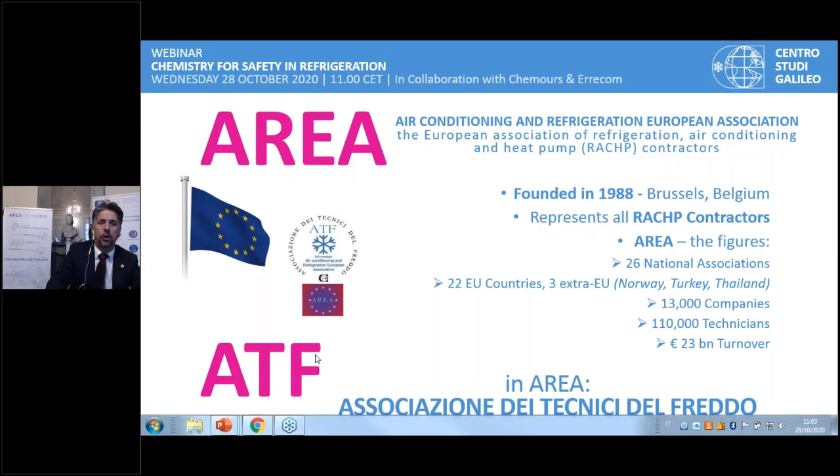I will go quick on this one. We do training, it's our main job. We do training in Italy and in 130 countries with the United Nations, with agencies of UNEP, UNIDO, UNDP, also with the European Commission. We did training all around the globe. For example, we had around 10,000 technicians trained and certified in the last 10 years.

Also, we do webinars. As you know, we have a YouTube channel, the Centro Studi Galileo channel, where you can find all the webinars we have done till now, and also there is one that is from today.

Also, we were one of the promoters of the World Refrigeration Day. Since the beginning, when we started, we were some of the promoters and one of the organizers of the World Refrigeration Day. So we enjoyed it a lot. The World Refrigeration Day we organized on the 26th of June 2020, and the speakers of today were present in this important webinar.

Also, we do conferences. The next conference will be in Milan. We hope to see you in person, not virtually like now we are used to. It will be the 19th European Conference, and the registration is now open. The last conference was very successful, we had 300 delegates from 32 countries, 4 continents, and we had the European Union, European Commission, United Nations, and the most important worldwide associations from America, Japan, Europe, of course, and of course AREA, my association.

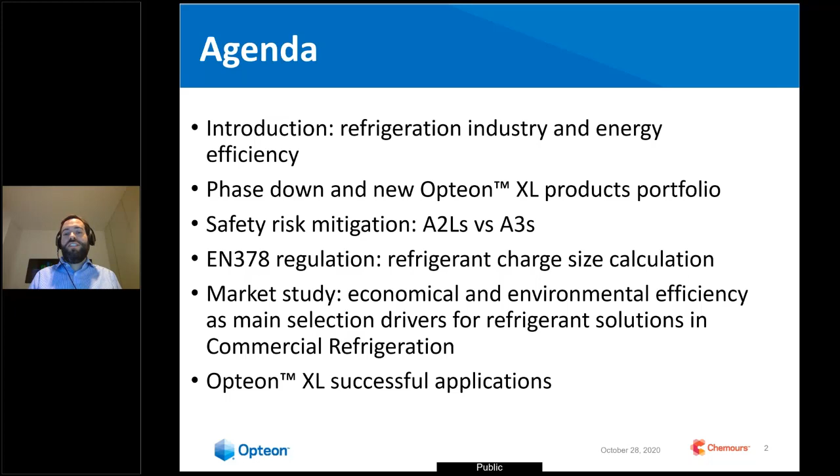So let me start with an introduction of the agenda. We will start with an introduction speaking about the refrigeration industry and the concept of energy efficiency. Then we will analyze the phase down and the new Opteon XL products portfolio, and then we'll go deep into the core of the presentation, which is the safety risk mitigation, comparing A2L refrigerants versus A3s. Then we'll speak about the EN 378 regulation and how to calculate the refrigerant charge size. At the end of the presentation, we will speak about two other very important factors, the economical and environmental efficiency for commercial refrigeration, and we will present some successful applications with real case studies.

So starting with the introduction of the refrigeration industry, I would like to present this study made in the US, just to let you know how important this industry is and how the demand is set to grow in the next years. You can see it is right behind the digital games market, for example, with an expected revenue of $135 billion in the US.

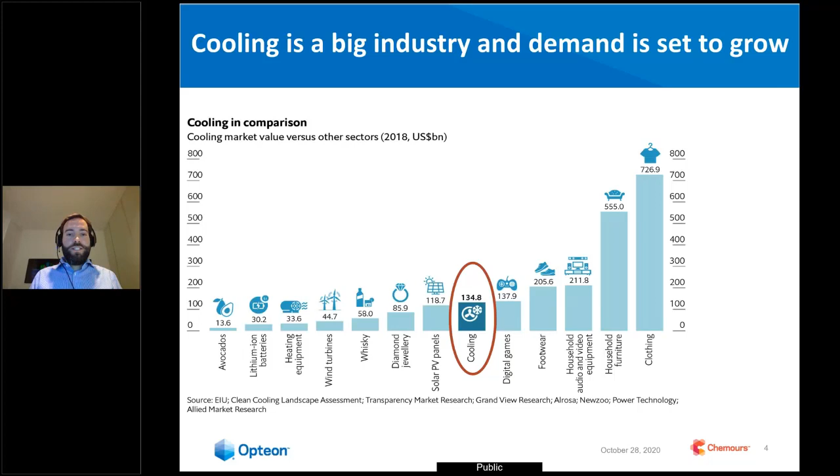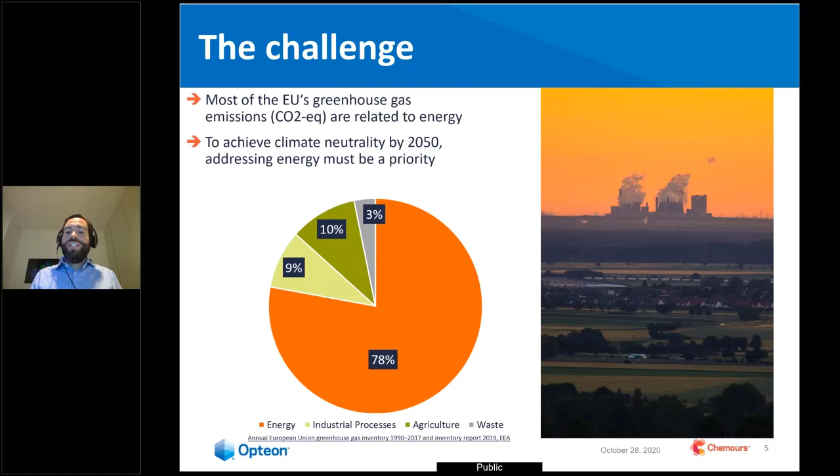The main and most important challenge we have nowadays, as you can see from the graph, is that more or less 78% of greenhouse gas emissions, considered as CO2 equivalents, are related to energy consumption. The rest is more or less equally divided into industrial processes, agricultural, and waste. To achieve the most important target that the European Commission has by 2050, which is reaching climate neutrality, we need to tackle energy as a priority and energy consumption.

Here we can see a deeper look inside the energy consumption itself in the European Union. You can see that more or less half of the energy consumption is related to heating and cooling with 47%, while the rest is more or less equally divided into transport with 28% and electricity with 25%. At the bottom, you can see the percentage of renewable energies contributing to this energy consumption, which is still a bit low.

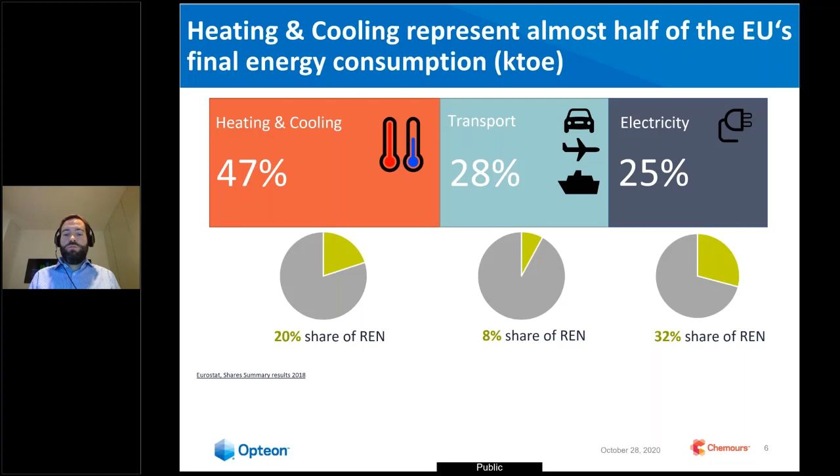Now it's important to introduce the TEWI concept. This considers the total emissions, not only the direct emissions of the refrigerant connected to the GWP, while in the formula you can see that the last part considers the impact of energy consumption, the annual energy consumption of the systems.

In the right graphs, the bottom one related to the European Union, you can see that as a contributor to greenhouse gas emissions, CO2 has an average of more than 80% contributing to this kind of emissions. If we consider HFCs, it's only related to about 2.5%. So with the F-gas regulation, we are tackling this small 2.5%, while we need to start considering, with the TEWI concept, the rest of the emissions, which are mainly due to CO2.

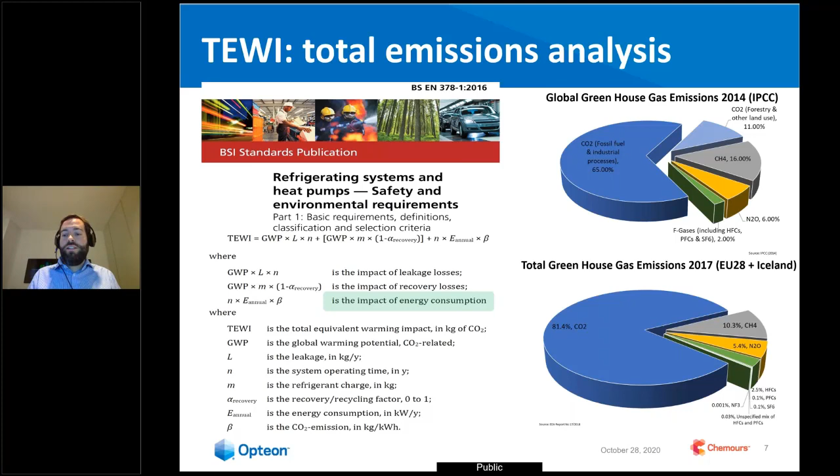Going deeper into the phase down, you probably know that we are running with the F-gas regulation right now in Europe, which is based on a quota allocated to importers and producers of HFCs in order to achieve, by 2030, a reduction of at least 79% in the use of these refrigerants.

You can see the orange ones are the commonly used HFC refrigerants like 404A, 410A for AC and heat pump, or 134A, while in blue we are showing our alternative refrigerant, the Opteon XP series, for retrofit or new systems with a lower GWP.

But if you want to consider really long-term solutions, we need to move down in the graph with the green solutions that we are providing as Chemours, which are the Opteon XL series. You can see that if we consider in 2030 an average GWP of 400, in most cases these refrigerants are far below this average level.

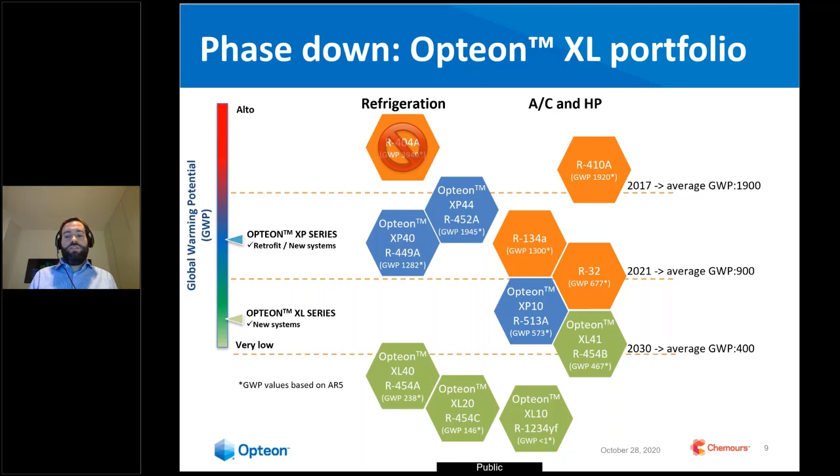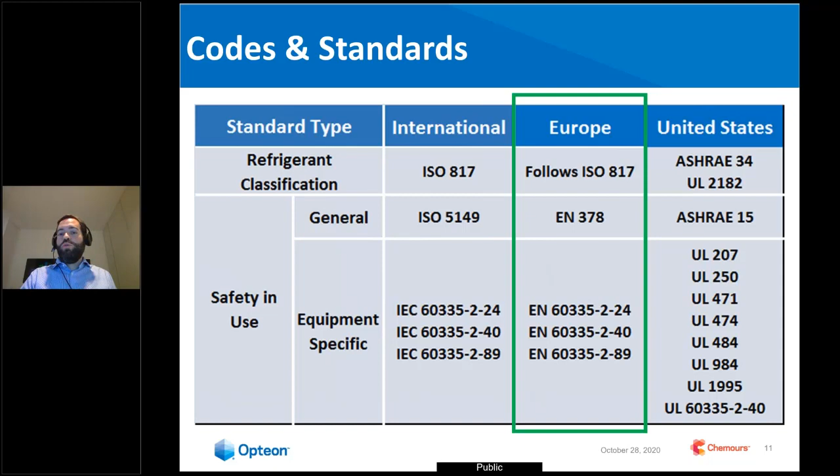Safety risk mitigation: if we start comparing A2Ls versus A3s, we need to start by introducing all the codes and standards that regulate the refrigerant. In Europe, for refrigerant classification we follow ISO 817, while for the safety of refrigerants we follow the general rule EN 378.

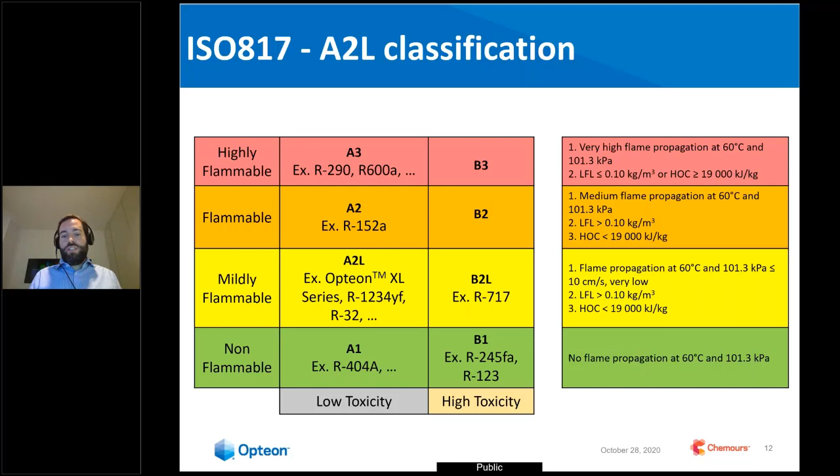In this case, ammonia is considered a B2L, so it's mildly flammable and highly toxic. To show you the characteristics of the flammability properties in this table, we are comparing some common refrigerants like propane, ammonia, and, for example, XL20.

If we start comparing the LFL, the lower flammability limit, it means the lower concentration range over which a flammable mixture can be ignited. Comparing propane, which is an A3, and XL20, which is an A2L, you can see there's a difference of 4 times bigger for propane.

Moving down to the minimum ignition energy, we can compare XL20 and propane, for example, of 2000 times higher for propane, 0.25 compared to values between 300 and 1000.

Moving down to the burning velocity, which is the speed at which a flame will propagate, you can see a very big difference. For example, an A2L like XL20 burns with a velocity of 1.6 centimeters per second, while propane burns at 46 centimeters per second. It means roughly half a meter per second.

At the end, the heat of combustion, which is the amount of energy released when a substance is burned. For example, Opteon XL20 in comparison with propane has a heat of combustion about 5 times less than propane. What does it mean?

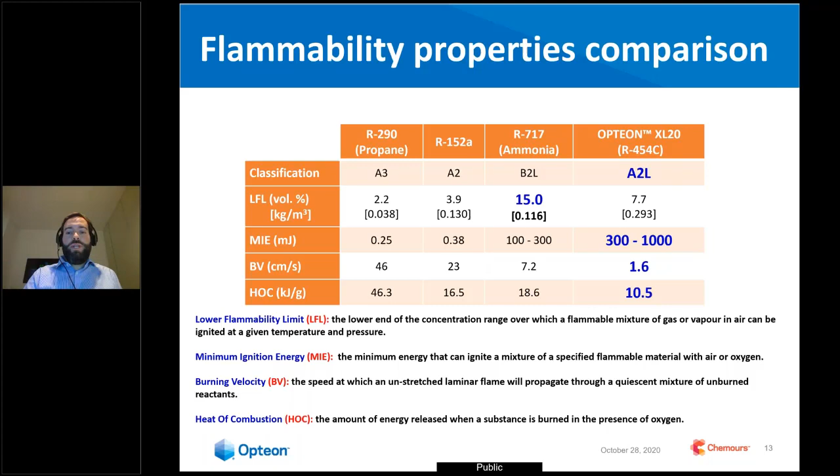We were speaking about safety risk mitigation because A2L refrigerants, as you saw from the table, are much safer and show safer flammability properties in comparison to A3 alternatives, which are highly flammable, such as propane.

We saw the characteristic of the A2Ls, that they are less likely to form flammable concentrations in the air due to the higher LFL. This enables larger charge sizes in the systems and larger application ranges.

Another important characteristic is that A2Ls are much harder to ignite, so much more energy is needed to ignite the refrigerant, making them very safe even to use with commonly used electrical components.

Just to give you an example, a static discharge or a simple spark, which is about 20 millijoules, could immediately result in ignition of an A3 refrigerant, because it's already 100 times higher than the minimum ignition energy for propane, for example.

A2Ls, as a last but not least important characteristic, are less reactive and have a lower combustion energy. So they can generate milder ignition events, and the burning velocity could be up to 30 times slower compared to A3 alternatives.

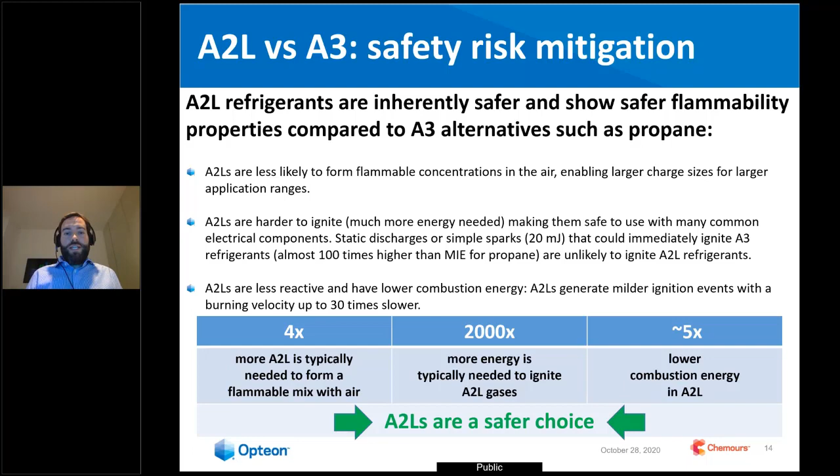Going deep inside the EN 378 regulation, I'm going to show you some examples taken from the Gazzetta Ufficiale della Repubblica, where A2Ls have already been published and released for use in new systems in commercial refrigeration. They are allowed to be used following this standard.

In the bottom part, you can see a comparison showing the maximum charge in systems between A2Ls, shown in green, such as XL41 and XL20 on the right, compared to propane, an A3 alternative, shown in red. You can see there's a huge difference between the maximum charge allowed in the systems.

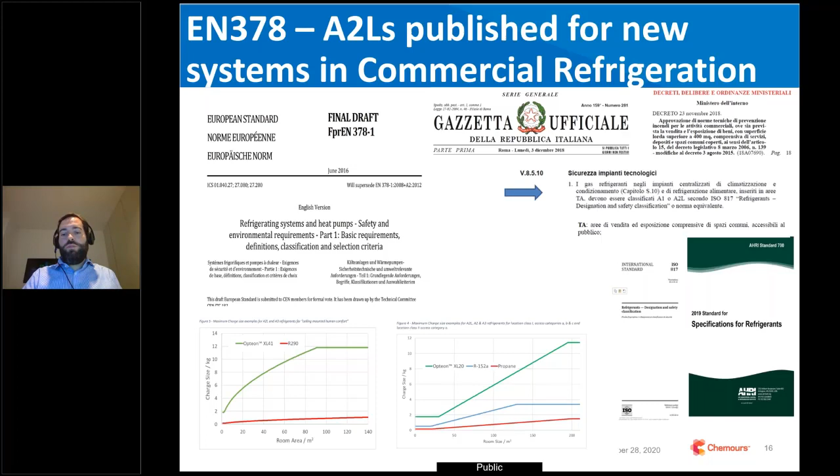But how can we calculate the maximum charge? In the EN 378, there's a specific section related to the flammability class A2L, where you enter, depending on the access category of the system and the location classification, and then calculate the maximum charge allowed with the formula.

It's important to state that there's no charge restriction for the typical industrial environment where there's less than 1 person per 10 square meters. So this is important to understand.

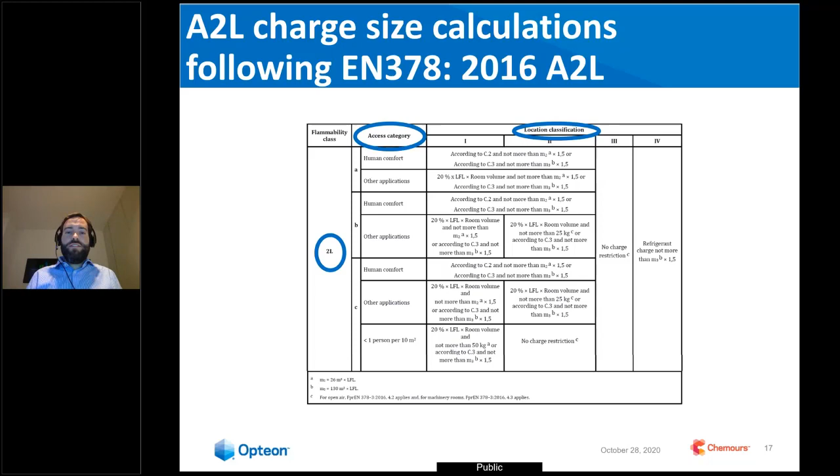In order to simplify this calculation, as Chemours we are providing a new tool that we developed. It's a free tool, so you can access freely this new calculator, which is the refrigerant charge size calculator.

It's very easy to use, because you just need to put the location classification, the access category, the refrigerant you want to use between XL10, XL20, XL40, and XL41, then the room dimension in volume, and then you can automatically calculate the maximum charge allowed following EN 378, depending on the safety measures you are using.

You can see in this screenshot an example of use of XL20 that the maximum charge allowed for each system is 57.13 kilograms. It means that it's not the maximum charge you can install, but the maximum charge per system.

Then you can use several systems to reach the cooling capacity needed.

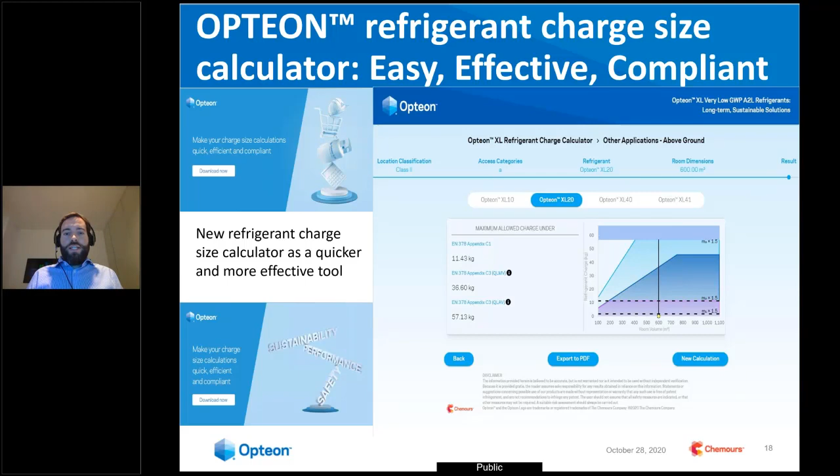The title of the presentation was related to the main differentiating factors. We spoke about one of the most important, which is the safety risk comparing A2Ls versus A3s, but there are also other important factors you need to consider when deciding which alternatives to use in commercial refrigeration, such as economical and environmental efficiency.

So a retailer, when he needs to change from an old installation running with 404A to new alternative technologies, must take some criteria into consideration: matching the cooling performance of the old system, matching or exceeding the energy performance, matching the uptime of the system, matching and possibly improving the total cost of ownership, and ideally matching the facility and ease of installation and maintenance.

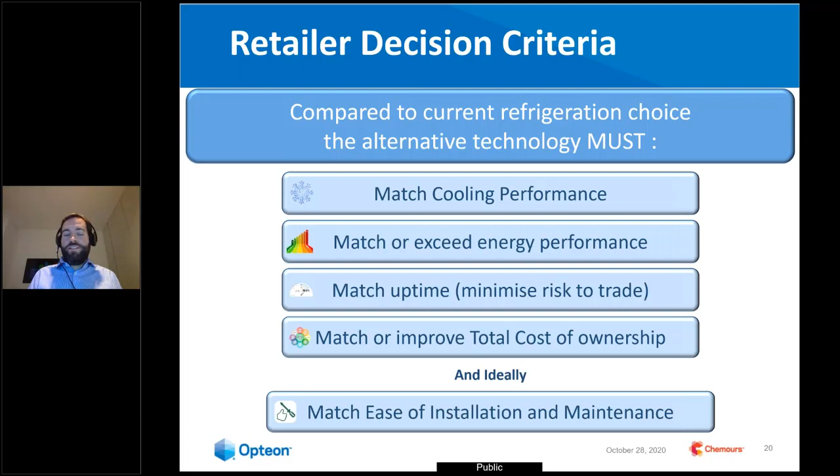As you probably saw in other white papers presented in past webinars, the results of an experimental study conducted by an independent consultant called WAVE, for a very important retailer chain in the UK named Asda, which you probably all know, showed that Opteon XL20 and Opteon XL40 are the best alternative technologies with very low GWP compared to old alternatives like 404A, and also compared to new alternatives like different CO2 technologies.

The results were corroborating all the decision criteria that the retailer needs to take. This means they are matching the cooling performance, exceeding the energy performance, matching the system uptime, the total cost of ownership, and very importantly, the ease of installation and maintenance, because it's a direct expansion system running with this new A2L refrigerant.

So everyone is already used to working with this kind of system, like an old 404A alternative. In addition, these two alternatives showed they can reduce total CO2 emissions by up to 20% compared with other CO2 technologies, but with the lowest life cycle and the lowest CO2 abatement cost. So they were matching all the decision criteria that the retailer needs to take into consideration.

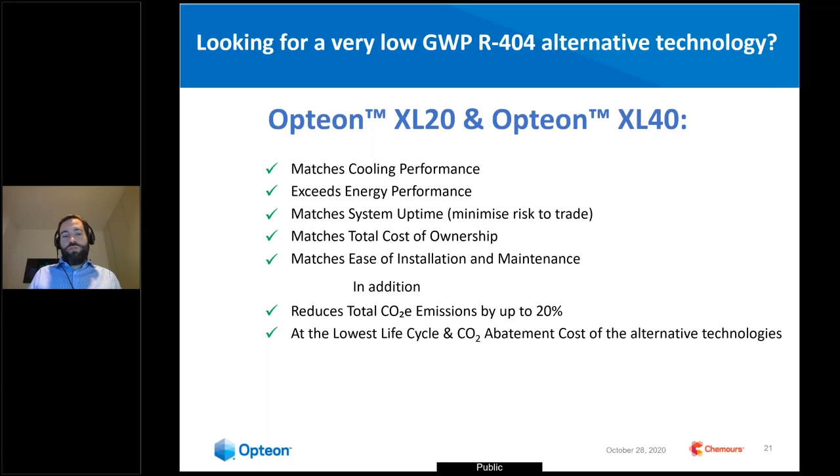But in order to corroborate all this experimental data, I would like to introduce now all the successful applications that we reached this year with the use of new A2L refrigerants.

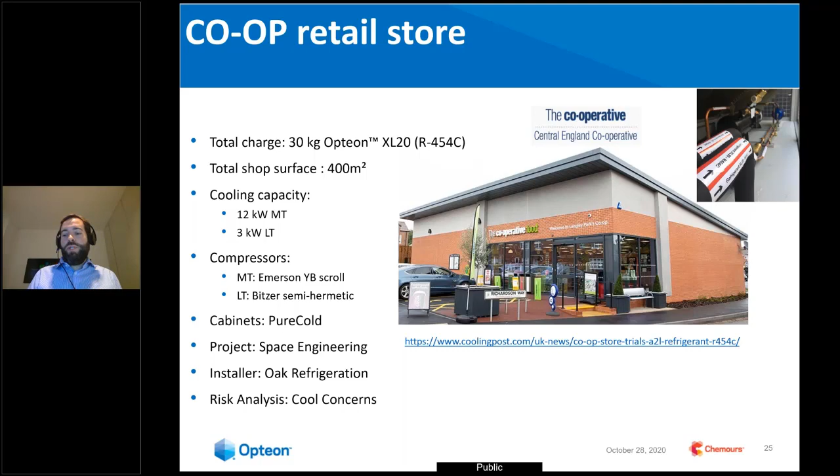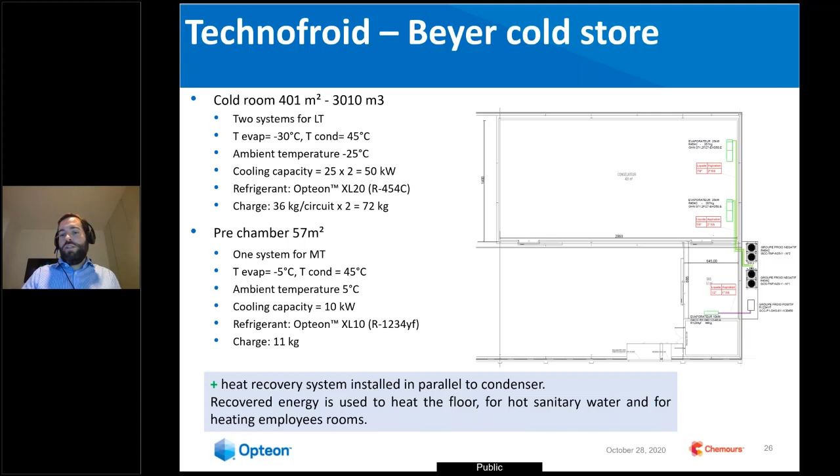It's important to underline that we also use the heat recovery system installed in parallel to the condenser, in order to optimize the energy consumption of the whole system. In this case, the recovered energy is used to heat the floor, for the hot sanitary water, and for the heat of the employees' rooms.

In this case, the components used for the LT and MT systems were compressors from Bitzer, evaporators from Güntner, electronic valves coming from Carel, and the risk analysis has been made through Semafroid in France.

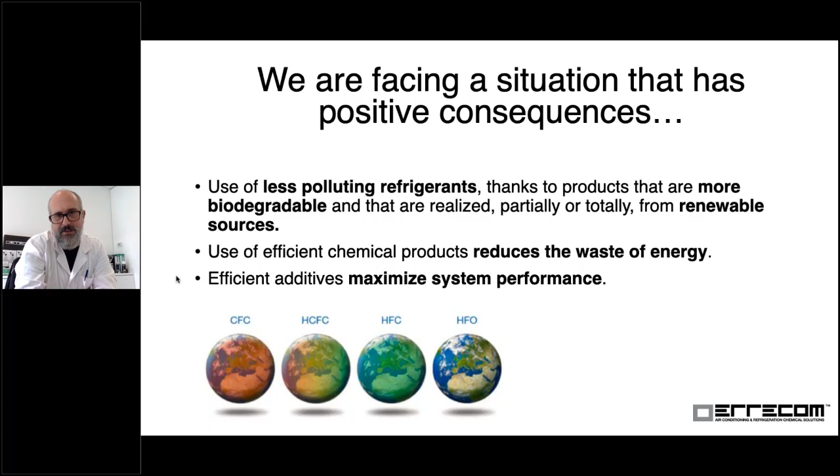We must pay attention to pollution, to the world - the gas must be more biodegradable, and we need to use renewable resources to have a new refrigerant. We have to use a minimum quantity of energy to obtain the same condition in the ambient, and we have to maximize the performance of the system. Of course, this is the target of every kind of new study.

But this kind of change brings other changes. More biodegradable products are less stable than the old ones and have different kinds of problems inside the system. What happened? What's needed to regulate this kind of necessity? We start to work on the lubricant. The lubricant is not a part you can forget when you study a new system, but is an important part inside your system, and you have to consider and find the correct one, the best one for the refrigerant and the kind of system you want to use.

No more can we use a generic lubricant - one oil is the same as the other, okay I need mineral, I need synthetic. The price is not the concept for studying a correct application of the lubricant. We need a specific one. If we have an application, if we have a kind of refrigerant, we must search for the correct lubricant to have the most important performance, the best performance we can have from this kind of couple.

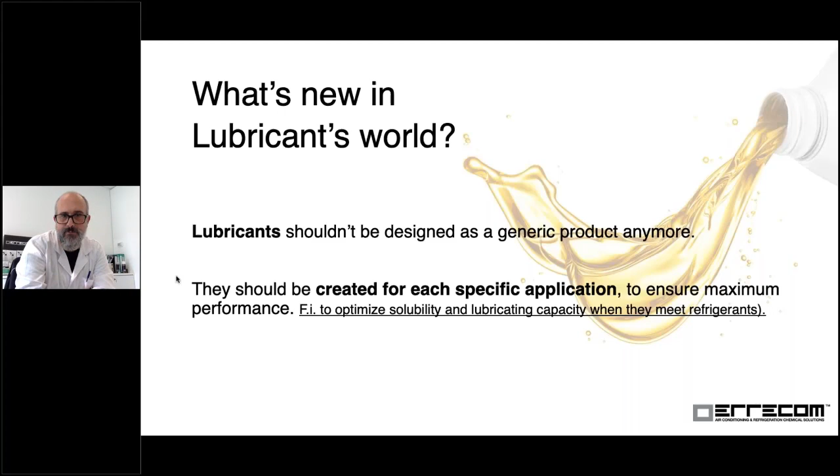The lubricant we use is synthetic and semi-synthetic today because the synthetic one can come from renewable and more ecological material and can be biodegradable. The mineral one can't have this kind of capacity. And the best performance we have with a new kind of refrigerant is with a synthetic lubricant.

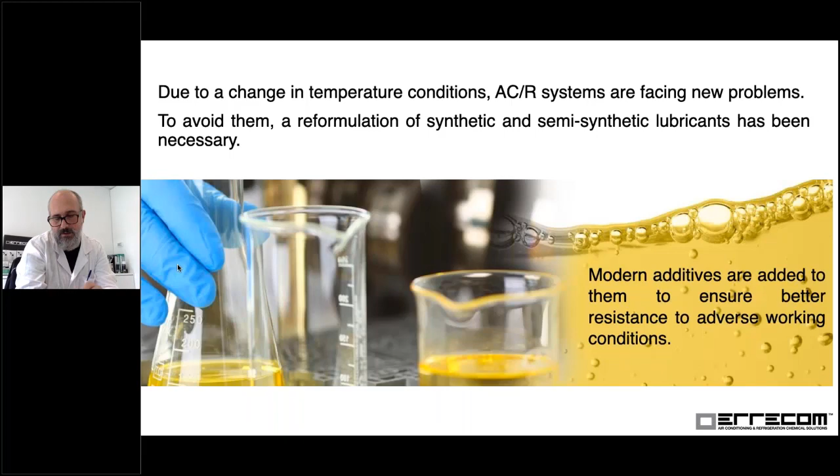For the new refrigerants - HFO, hydrocarbon, CO2 - we must have a correct lubricant, and new lubricants were starting for specific applications. At Errecom, we prepared a new kind of pack for the hydrocarbon market, especially for R600, R290 series, but not only this one - this one is most frequently asked for.

POE for CO2 and PAG for CO2, because CO2, depending on the application, can select use of polyol ester or polyalkylene glycol, depending on the type of application, the type of temperature you need to work at, the type of compressor. Every kind of system can need one or the other, and in this case it's important to understand that POE for CO2 cannot be mixed with PAG for CO2. They are two lubricants that perfectly work with CO2, but are not mixable with one another - not exchangeable from one to the other. They are two different products you have to use in different applications for your kind of system.

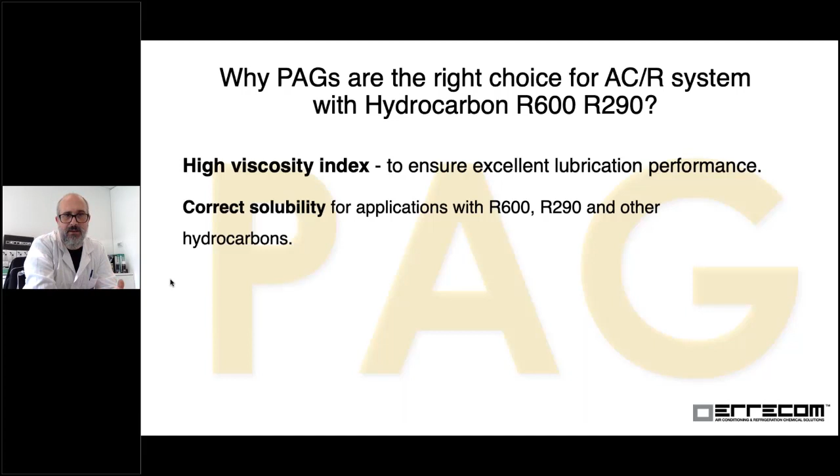Best solubility or correct solubility when you apply it with R600 and R290 and other hydrocarbons. The solubility of ethylene glycol was lower when mixing with this kind of hydrocarbon, and for this measure of application it is the best solution for your kind of system.

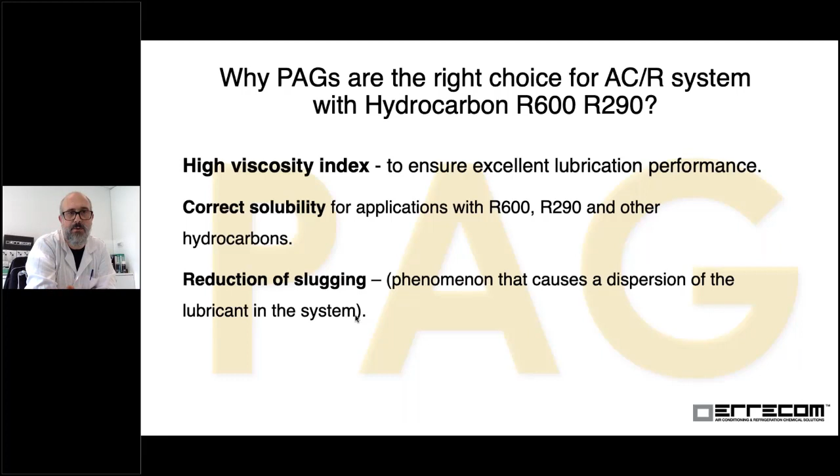And of course, for correct solubility, we have a reduction of slugging, the phenomenon of lubricant moving around in a ball in your system, and the problem we have when we have a lot of lubricant around in the system and not in the compressor.

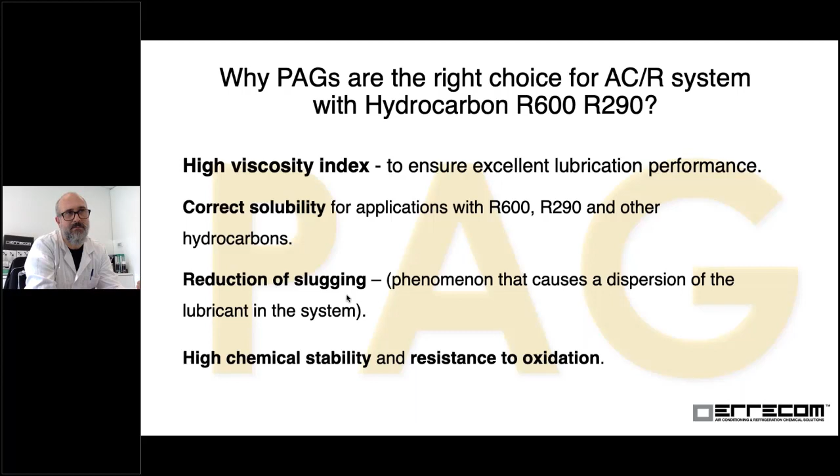Our polyalkylene glycol has high chemical stability and resistance to oxidation. The material put inside the lubricant, the additive we can use, goes to maximize the performance of our lubricant.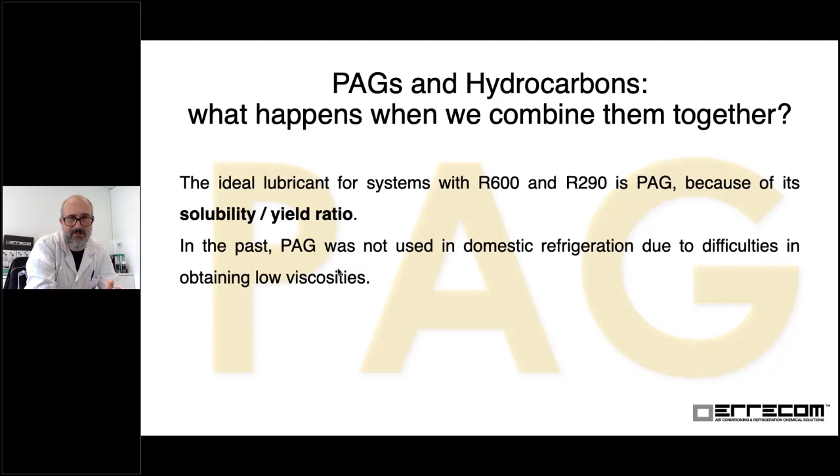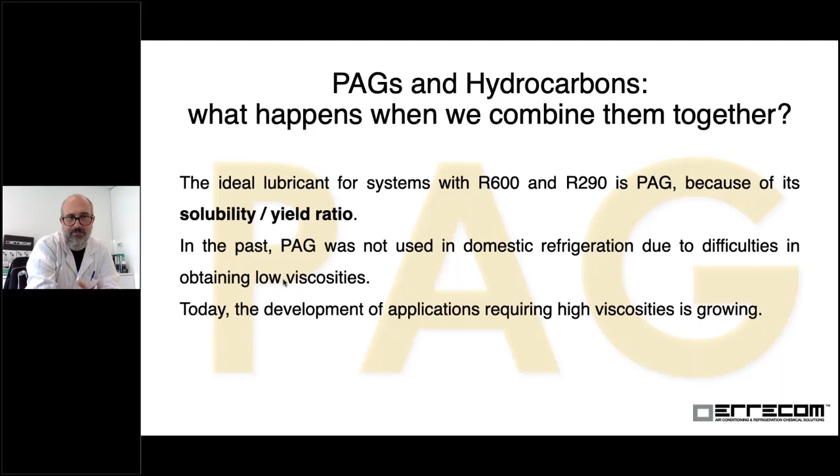The PAG was not used in the past because it had difficulty finding viscosity under ISO 32, 46, and this was a historical problem. But today we have a lot of systems with hydrocarbon that need very high viscosity, like 100 or 150 or more. For this condition, we can use PAG with all the advantages of this kind of lubricant in this new refrigeration system.

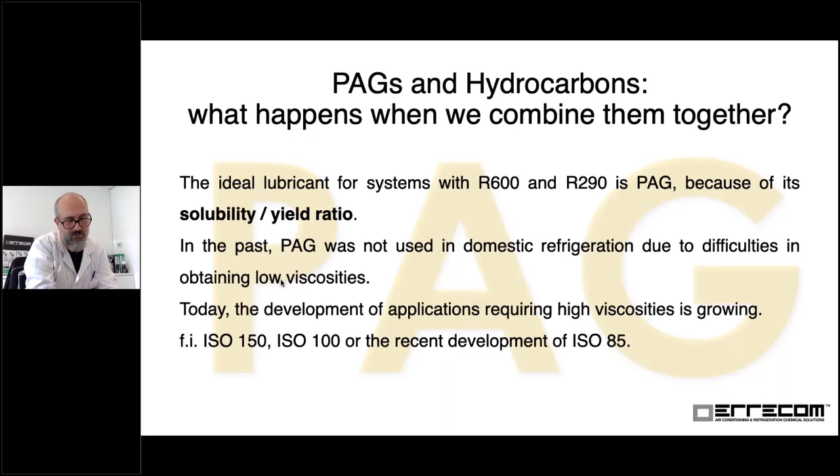And recently, we started to develop a new ISO 85 in PAG for some applications with two producers of compressors in Italy. And this is a new proposal we are going to present.

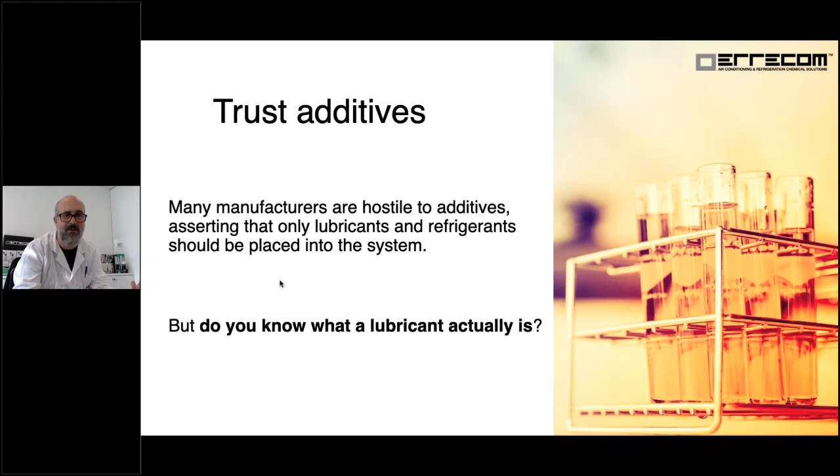Not only the lubricant requires correct attention to the system, but the additivation of the system is also very important. The lubricant is not the pure base of ester or glycol, but the lubricant finally is a mixing of many chemical products. Many producers of systems say, oh no, I don't want additives inside my system, but the lubricant is a mixing of additives. There is no lubricant today that is pure ester molecular or mineral molecular. The lubricant is a mixing of anti-corrosive, antioxidant, anti-foaming agents.

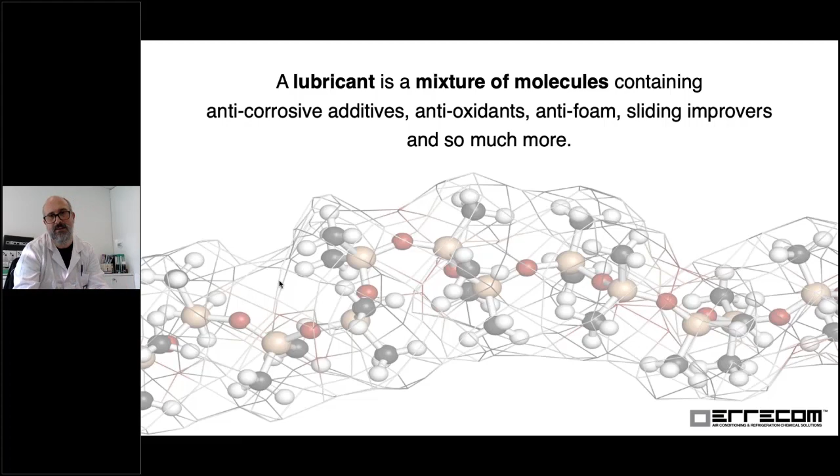You have to improve the lubricity capacity of your lubricants inside the system for any kind of refrigerant you have in your market and in your system. The lubricant is a complex mixing, and we studied the correct solution for every kind of mix. So the additive is based on guaranteeing the correct functionality of your lubricants, and you have to select the correct additive and correct quality of your lubricants.

Now I want to show our additives. The new series Ultra White is dedicated to applications with hydrocarbon in small refrigeration with hermetic compressors, using the R600 series or R290 or R134a. We have not only this kind of additive - this is an example for this kind of application - and this new series is a child of the original series we have in the market for applications with normal refrigerants like HFC or HFO.

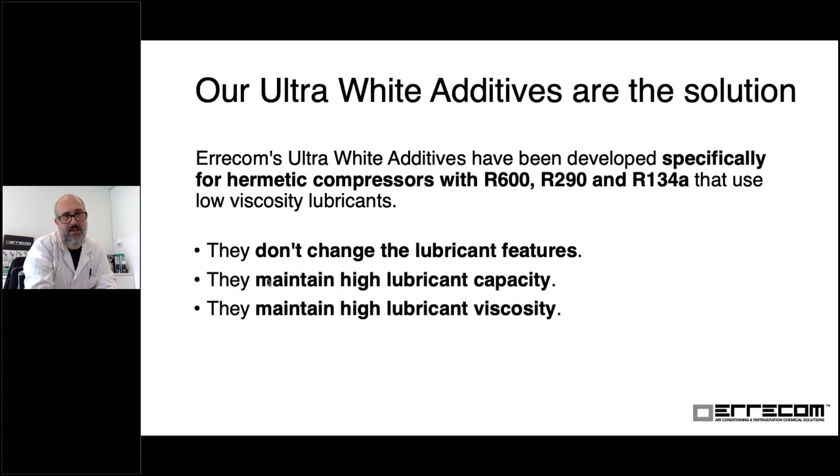The additive was studied to not change the lubricant status, not change the lubricant characteristics, maintain high lubricating capacity of the system, and high lubricant viscosity has not to change - there is no change of lubricant color in this application. In other applications, there is some color added, you put inside the system an additive. In this case, we have selected one that doesn't change the color of the system.

The first one is a Super Dry Ultra that removes moisture, removing water from the system by a reaction. It doesn't produce solid, but produces a new lubricant molecule. The reaction between water and the additive inside this product generates a new lubricant and doesn't change the characteristics of the whole lubricant inside the system.

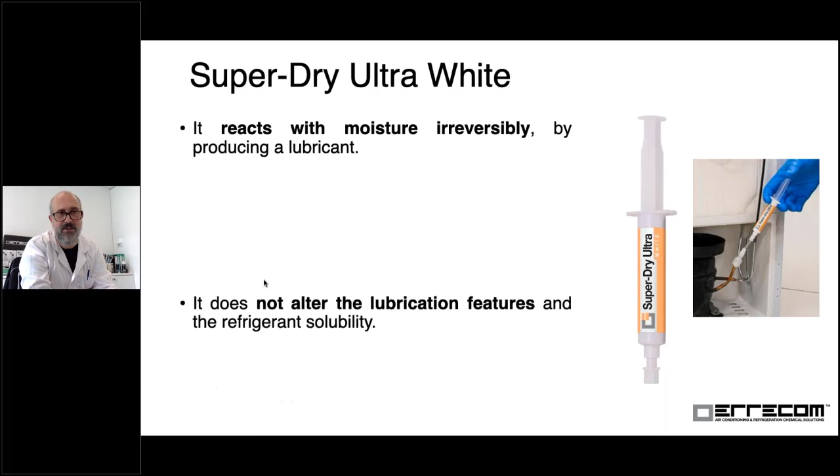And importantly for this kind of product, it doesn't produce solid. There is a lot of chemistry to remove moisture or water inside the system, but a lot of that chemistry, in reaction with water, produces solid - for the system this is a very big problem. This kind of product doesn't have this kind of problem; it produces lubricant.

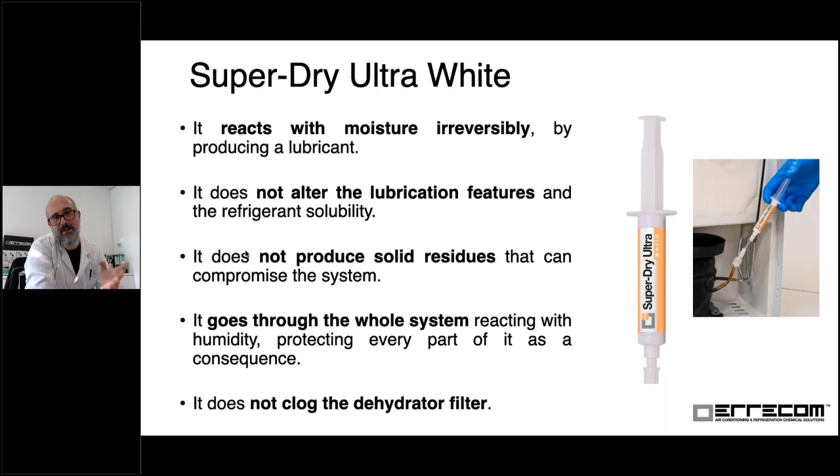Every part of the system can find the moisture. You have the filter for moisture, but the filter is static, only in part of your refrigerant system. The additive can travel around in the system with refrigerant gas and find the humidity, the moisture, in every part of the system. If the moisture is stopping, say in the exchanger or in the valve, and can have a reaction in this kind of area, there's no problem with the hygroscopic filter, of course.

No Acid Ultra is the second one, and it neutralizes free acidity inside of the system. There is a reaction of elimination of acidity inside of the system, because if we permit the acidity inside of the system, this kind of acidity can be catalytic, and can start a new formation of acidity. We have to stop it and make it impossible to produce new acidity.

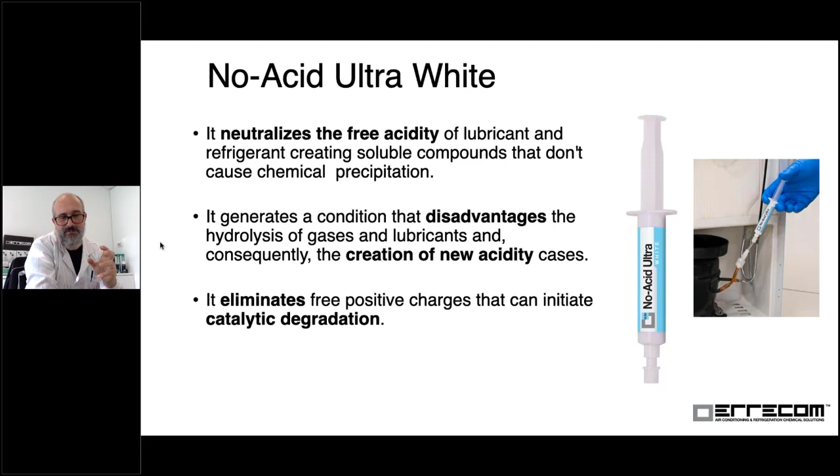Eliminate the free positive charge. Acidity was normally in chemistry considered by the presence of free acidity, which was positively charged, and the system works to remove it from the system, and passivates the metal of the pipe and of the exchanger and compressor to prevent a new possible corrosive attack on the metal.

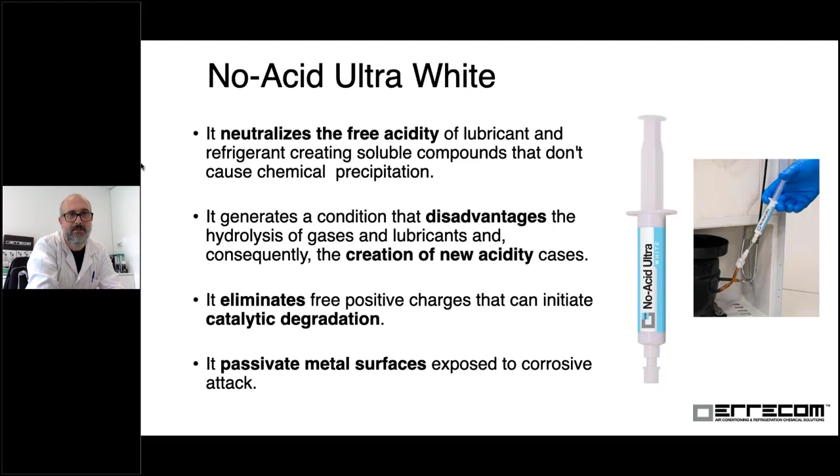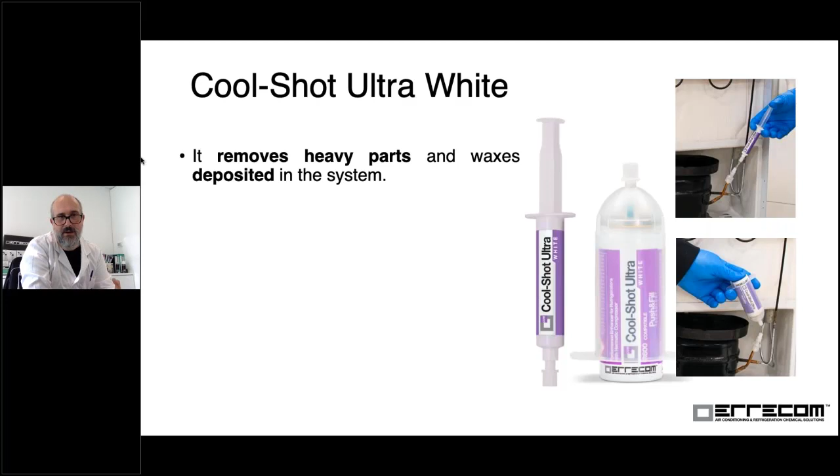Cool-Shot Ultra White is a special additive to remove the deposit of lubricant and waxes inside of the pipe and the exchanger. When we have oil fouling in our system, some lubricant remains inside of the system, stays in the exchanger, and over time reduces the exchange capacity of the system and the power of the system. This kind of product takes this wax, this oil, and makes it come back to the compressor.

In the second step, the product makes a protection on the pipeline and exchange line against new deposits of lubricant in the pipe, and maintains over time the correct performance of your system, restoring the efficiency of initial system conditions. This product cannot make the system more powerful than when it was new, but it restores the performance to when the system was new, after many hours of work when you have a lot of oil fouling and a lot of lubricant deposit inside of the system.

Extreme was our most important product. This is a leak stop. It permanently seals the leaks, the micro leaks inside of your system. When you have some leaks, you can't find them easily because they're so small, because you don't lose your charge of refrigerant in one day or one week. You lose it over the month. You know there is a leak, but you can't find it with electronic nose, with tracer or other systems, but you know it's there.

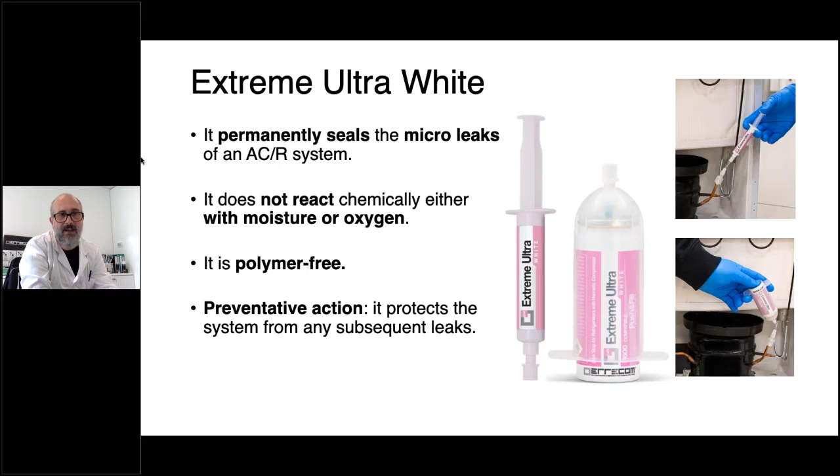You can use it like a prevention, because it's like the blood of the person traveling in the system, and only when there is a leak does it go inside of the leakage and block it, stop it with a physical barrier, not with a chemical reaction, and it permanently changes its condition only with the change of temperature, during the work moment and the stop moment. It's a little bit slower than a polymeric one, but always problem free - only the solution, not the problem of the reaction and polymer product.

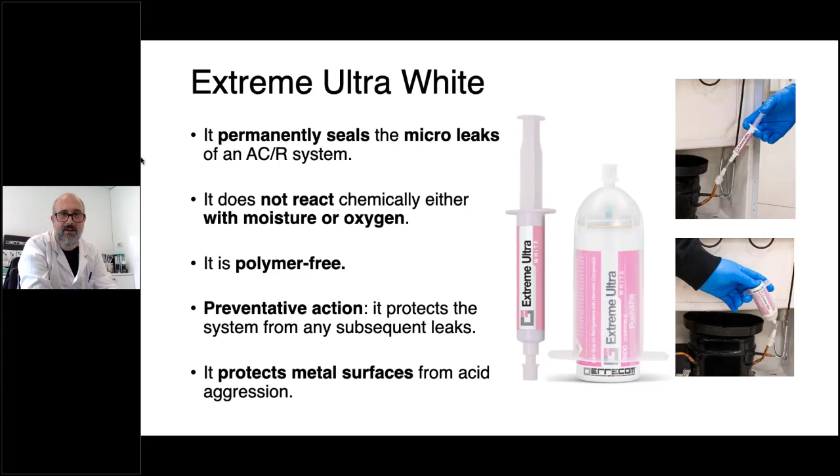Why do we call it ultra? Because there are already normal series of this kind of additive in the market, but our study was to reduce the ratio of additive needed in the system, from one to 125 parts of the lubricant in the system - one part of the additive for 125 parts of the lubricant. And this doesn't change the level of lubricant inside of your system. Of course, it's a very small quantity.

You can put all the additives inside your system if you want, or select which one you need. Because if we've arrived at the leakage, it's possible we have corrosion. If we have corrosion, we probably have acidity. We can put in No Acid to remove acidity, and Extreme to close the leakage. It's not correct to only close the leakage if we don't have a solution for the other parts - removing the acidity or removing the moisture - because that can generate acidity, which can make aggression on the metal.